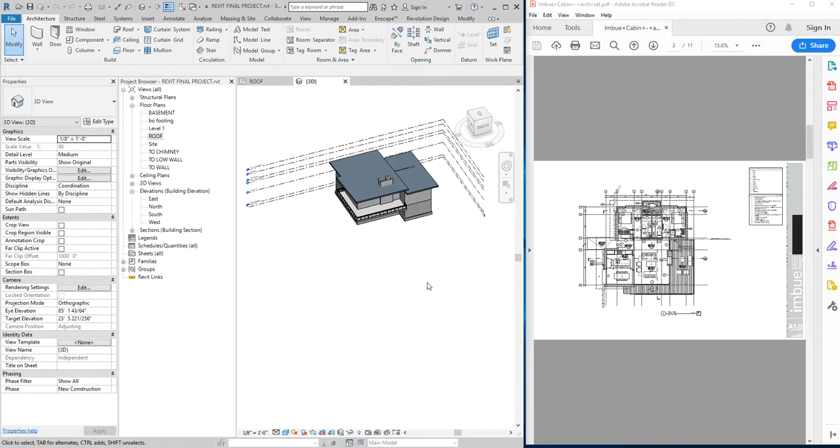All right, so I'm going to add the garage, which is part of our late term project here. Let's go to assignments, then to the late term project, and take a look at things.

So the garage isn't tricky really, but there are probably some things you haven't seen happening before. Let me put it in place of this little guy here. Okay, I can't quite get it. I might have to pull it onto my other screen. Let's just talk about it instead.

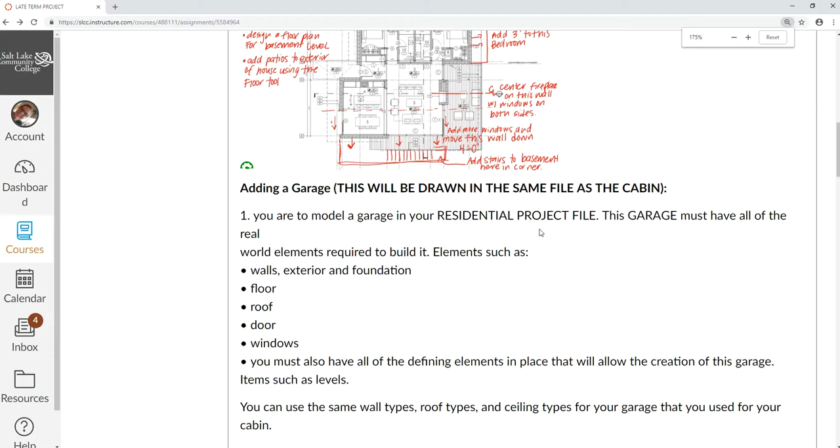So basically, this is what the garage is going to look like. I'll zoom in here and point out some things. It's going to be 20 feet away from the house, and the roof is going to slope just like this roof right here, so this is the tall point and it will go down to the low point.

This is what the wall is going to look like. There's going to be a little footing, 30 inches below our grade, which can be considered finish floor, level 1, or ground level. We're going to have a foundation wall that comes up to finish grade but then extends up 18 inches above that. So the garage will have a concrete stem wall all the way around it, and the wood wall will begin at that point and go up towards the roof.

So things you maybe haven't thought about doing, we're going to talk about in this detail as we create this garage. This will require us to create some new levels for the garage, to get our walls working correctly, and to use base offsets and top offsets to make things work. We'll have to create a new roof, and I'll have to check inside Revit again - if it doesn't have a garage door built in, we'll have to go to somewhere like Revit City and find a garage door to install.

All right, so I'm going to just look at this on my other screen here. Sorry guys, I wish I could put on the other one, but I guess I can just maximize this since we're not looking at both on the same screen anymore.

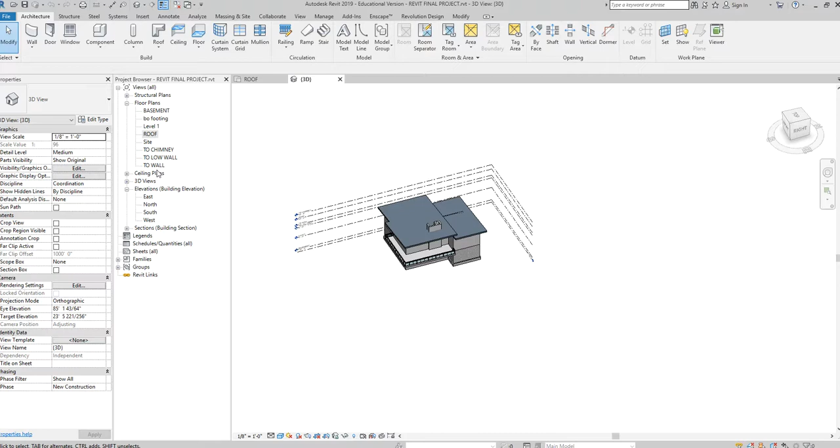So first thing I'm going to do is go to top of wall here, in shade view. I'm going to go to top of wall because I want to see where this roof is. I think that maybe my roof or my deck is longer than it should be.

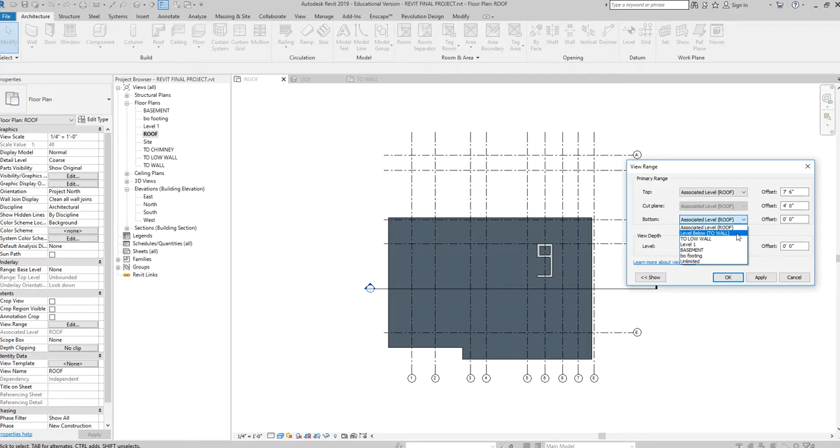Or maybe it's just being cut off from my view. Let me look at my roof level here - yeah, okay, my roof looks pretty good, so I think it was just cut off in the view we were looking at. I'm going to come down to view range and edit the way I'm viewing my tall roof floor plan so I can see the lower roof below it. Top of wall - there we go, looks pretty good.

Okay, so my garage is going to be 20 feet away from the section of this building that has that larger roof that kicks back, jogs back right there. So it's just going to be below here, essentially.

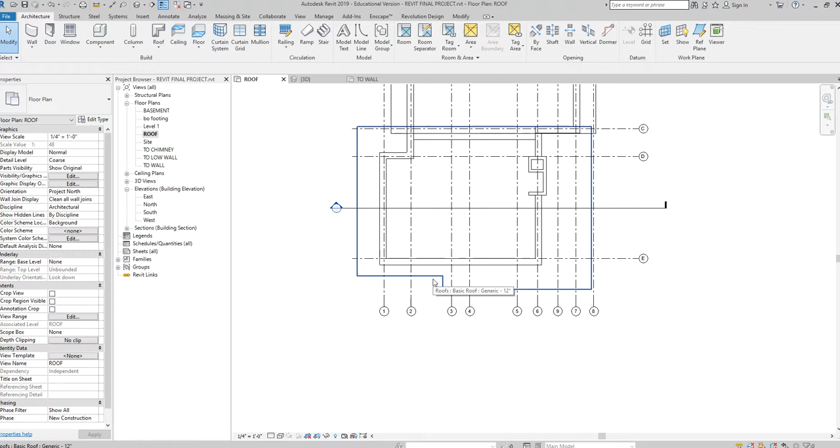So I'm going to change to wireframe view, WF, and I could also come down here and change my views to hidden line or wireframe. The reason I'm doing that is because I know my garage has to be 20 feet off of this exterior wall, so I'm going to make my roof wireframe so I can see through it and see this wall below it.

Before I actually start drawing that garage, I know it's 30 feet by 24 feet. I need to look at my levels and determine where those levels are going to fall for my garage. So I'm going to go into my north view here and look at a few things, and I think I'm going to still establish... let's see.

I'm going to establish my level 1 as the level for my garage, so there's no steps around my house, and the garage is going to be on the same level as the house. Maybe a little shorter, about 10 foot tall. I'll establish this level 1 as my finished floor for my garage, at ground level, finished floor level.

But I have to have a foundation wall that goes 30 inches below that, and right now I don't have anything 30 inches below level 1 to indicate where my garage foundation goes. Don't be confused by the term foundation wall—think of it like a basement wall, just a short one that goes 30 inches below ground instead of 8 feet. We'll treat this foundation wall the same as a basement wall, and this little footing the same as the footing on our house's basement. It may be a lot shallower, but it's still the same idea.

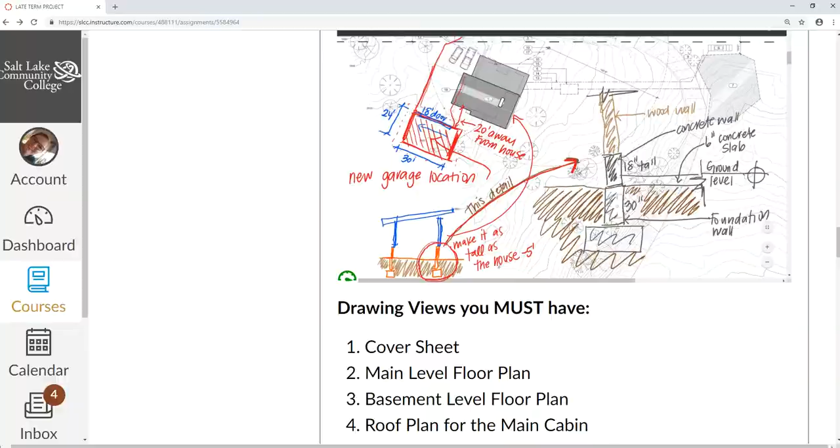So we'll have to do another bottom of footing level, but it's going to be for my garage. I'll call this bottom of footing garage.

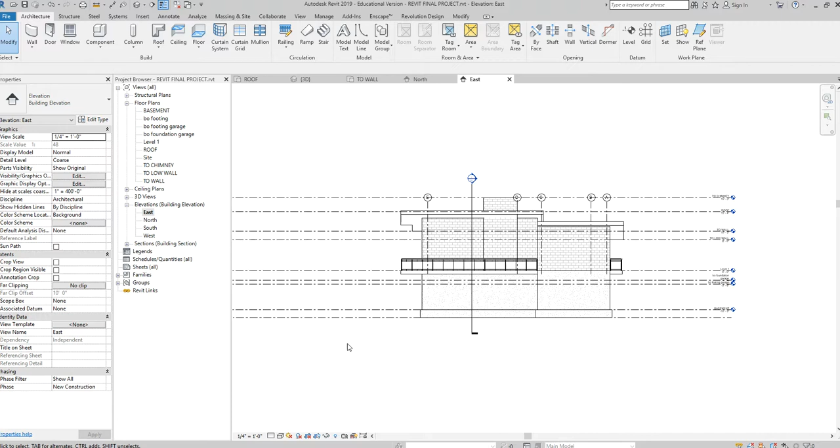Now these levels are going to start showing up everywhere. If I go to my east elevation on my building, I see those new levels. If I go to the south, I'll see them again. They don't really relate to my house, they relate to my garage, so I could likely choose to turn them off. If it gets kind of cluttered, I'll probably do that. If my drawing is not very cluttered, then I might just leave them on.

You guys will of course have lovely windows and everything on your projects. If my text begins to overlap like this, I'm going to click on it, click on that little elbow, and make everything look the way it should.

So I'm going to go back to my level 1. We've established that the garage is going to be on this side of the house, and now I'm going to start drawing the outline of my garage.

Here's one thing you have to think about—it's not necessarily on the plan, but the garage is 20 feet away from the house, yet my garage has to give enough space so the cars can drive in there, which means I have an 18-foot door here. My garage is 30 feet. Let's say my driveway is going to be 20 feet wide—we'll just make up a number, or you could do 22 or 24. I'll look at your drawings and see if they allowed enough space for the cars to come back here and get in. In placing it, in terms of how far away the garage is from the house in this direction, I just need to think about cars driving back in there.

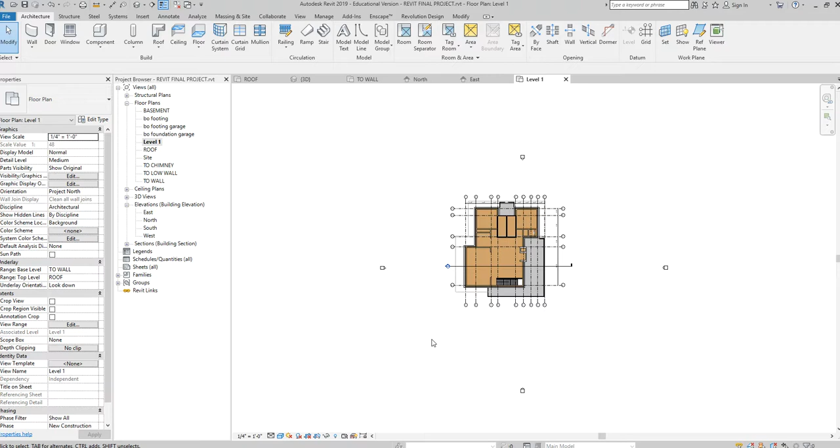Again, I might draw it and not get it quite in the right spot, but this one I think I can do a pretty good job. So what I'm going to do now is start placing my garage, using reference planes to help me get it in the right spot. Reference planes are kind of like construction lines—I can place them in my drawing and make them a specific distance away from items, but they don't print. So they can help me line things up, but then they don't print, which is nice.

So I'm going to type RP, reference plane, and I'm going to draw one here, and one here. I didn't really measure because I likely couldn't have gotten them the exact dimension away from the house I wanted them to be. But I know that this first one I want to be 20 feet away from the house because that's how far the garage needs to be from the house.

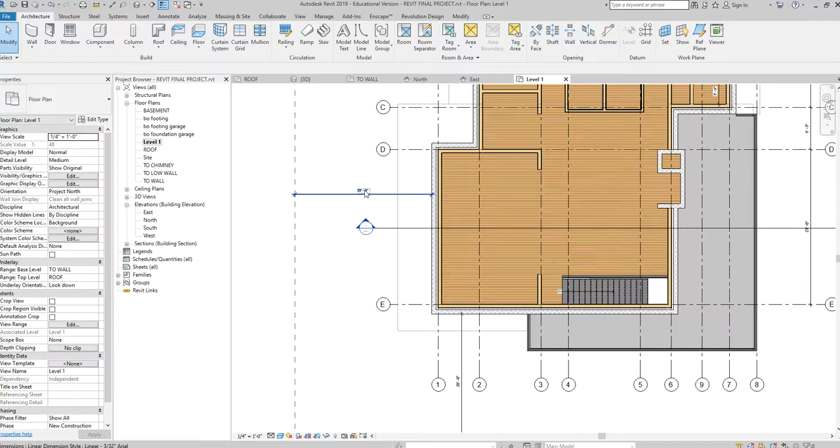So, DI dimension, and that says 9'7". Well, we want it to be 20 feet away from the house. So I click on the reference plane, click on the dimension, 20 feet. Perfect. Now I want this to be at least 20 feet away from the house so my little cars can get into my garage. DI dimension, click, and I'm going to tab, click. There we go, pretty close. We'll do 20 feet. So what I've just done there is established that my garage has to kind of start, one of the corners has to kind of start right here so that my little cars can come down and drive in very nicely.

All right. So I've done this, but now I'm thinking to myself, well, I'm going to draw my walls. The base constraint is going to be the main level of the house, but the top constraint - you'll notice I made a little change. I drew this and then I thought, you know what, I think I'm just going to say make the inside height of the garage 10 feet for the lowest point instead of the noted height. So this is kind of a little mistake right there.

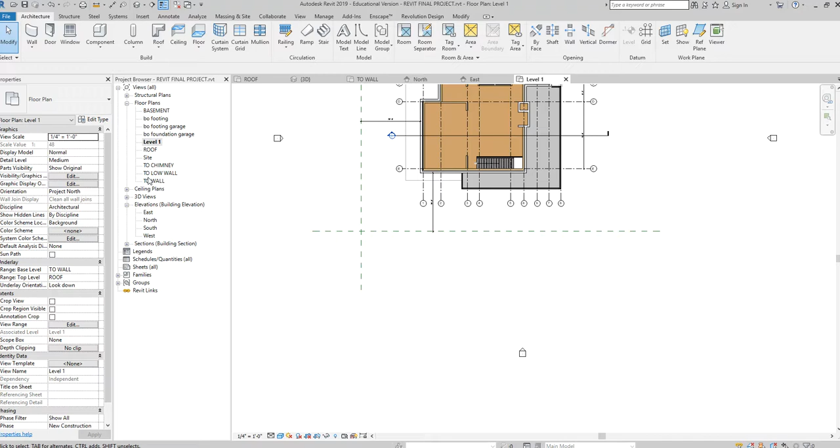Okay, so I'm thinking, how am I going to make that garage 10 feet tall? Well, I need to create another level, right? So I'm going to go to my north elevation again, which is where I like to create levels. And I'm going to go to level. I'm going to create one more level, and it's going to be 10 feet, and it starts to make things messy, which I don't like, but I have to kind of deal with. Okay, I'm going to call this top of wall garage.

And it's okay, you don't want to make too many levels, but don't be afraid to have them. I mean, they are there for a reason, right? They're organizing your drawing, they're establishing datums. So don't be afraid to have them. Okay, so I've now defined top of wall garage. I have my foundation wall for the garage and the footing for my garage. And top of wall will sort of, for my garage, establish where the roof sits. So I think I have everything now to create my garage.

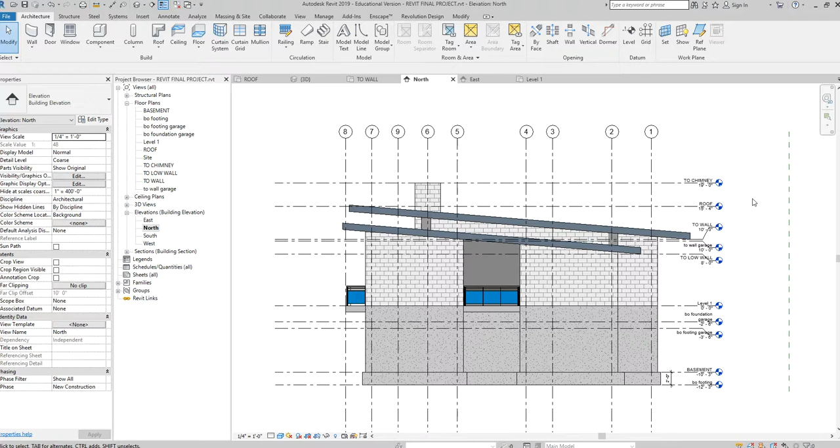Back to level 1, and I'm going to use this exterior wall to create my garage. So I'm going to do that right now. I'm going to grab this wall, and I'm going to choose create similar. We talked about create similar, and I'm going to draw a garage that is - oh, I want to draw from the finished face exterior - 30 foot by, we'll say, 24 foot. It's almost as big as the little house.

There we go. So now if I pop into 3D, got a lovely little garage happening over there. Okay, so, oh, I forgot to define my walls after I went and made those levels. I'm going to grab my exterior walls, hover, tab, click. Okay, so finished face exterior goes from level 1 up to top of wall garage. Oh, it just defined itself nicely for me.

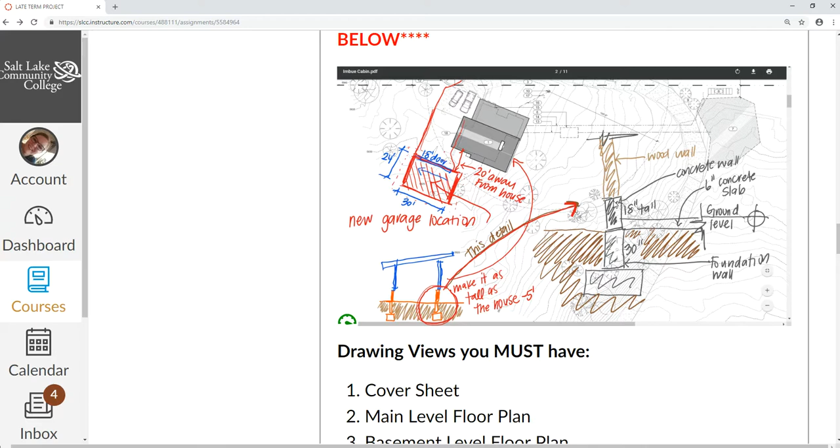Great, that is wonderful. But I need to look at a few things here before I continue on, because the next thing I need to create is the little foundation wall that goes underneath that garage wall, right? And that little foundation wall starts 18 inches above my finished floor, and it goes 30 inches below my finished floor. So my actual exterior wall that I just had drawn, that won't actually go down to the finished floor. It needs to be up 18 inches to accommodate that little foundation wall below it.

Okay, so what that means is that this wall, it needs to have a base offset. Okay, so let me - we'll look at these as we draw. Hover, tab, click. So instead of it starting at level 1, I'm going to give it a base offset of 18 inches. Hit enter. And, oh, maybe - did it already hike it up? Yeah, did you see that? Okay.

There we go, hiked it up. So now if I look at these in elevation view... oop, my elevation is not showing. Ooh, we gotta do something else too. If I look at this in elevation view, there's my garage. There is level 1 right there, and that garage wall is sitting just above it.

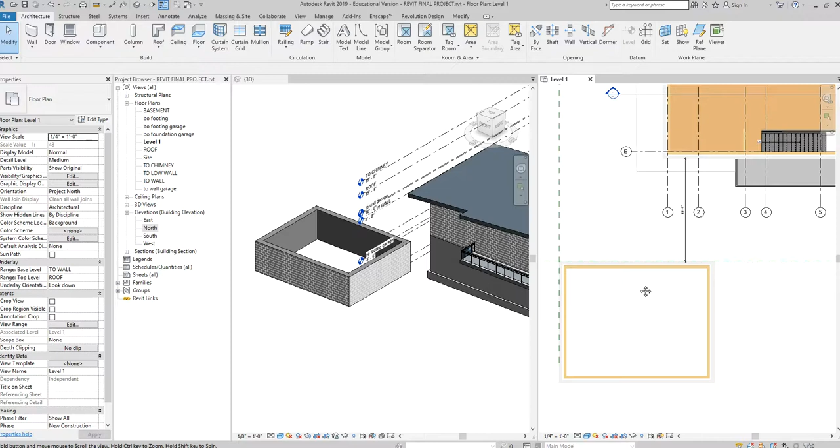Okay, so now what that means is that I can generate my little foundation wall below that, right? And it will work. So I'm in level 1 again. I'm going to go to wall, and we're going to do our little concrete foundation wall here. This is going to go from the base constraint of bottom of foundation garage, and the top constraint will be level 1, right?

But then you're thinking, well, if it goes to level 1, there's going to be an 18-inch gap between level 1 and that wall we just generated, because we bumped it up 12 or 18 inches. So I'm going to do it as is so you can see what's happening, and then I'll give it a top offset to fill the gap. Okay, so that looks pretty good to me.

Use my pick tool, and I'm going to change my location line to finish face exterior. Click, click, click. There's something very satisfying to watching all of that happen over there, right? And I've just generated the foundation wall, but there's a gap there, right? Hello. But that makes sense, because I gave this a base offset of 1'6".

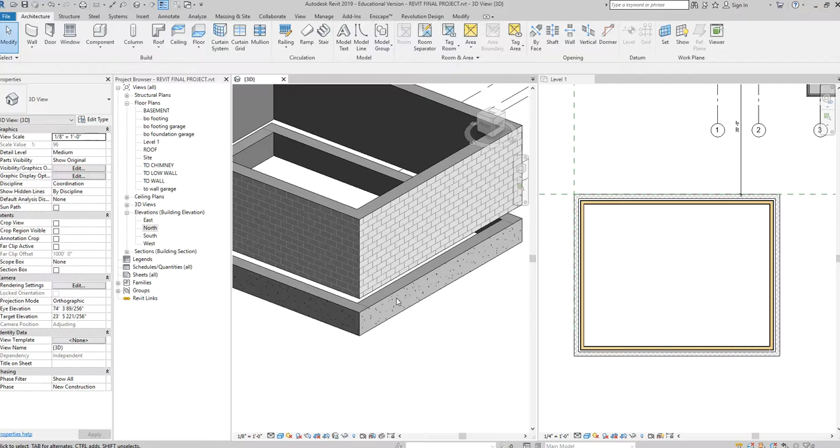So now I need to take this foundation wall, tab, click, and I need to make it so it comes up and meets that wall. So I'm going to give it a top offset of 1'6".

And there you go. So I look at the south elevation, just nice and wonderful here. Okay. There we go. So here's my main level right there, and my foundation wall comes up above 18 inches above. My wall comes down and meets the top. Okay.

All right, so that looks all good. It's time for me to add my footing. So now I'm going to go to bottom of footing garage, and I'm going to add my little footing wall, which is just a thickened foundation wall, right? We draw it exactly the same way we do the foundation wall, but it's just wider. We talked about that last time.

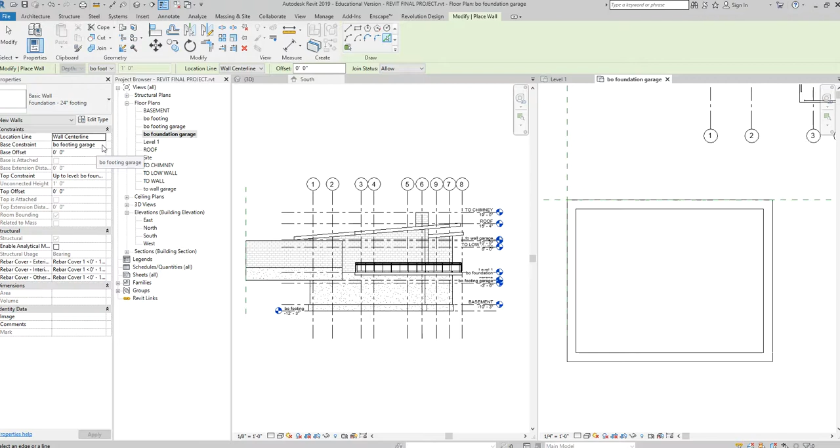So wall, and this one is going to be my footing. We're going to draw it to the center line. My pick tool. Let's see, bottom of footing garage. No, we want it to be, yeah, bottom of footing garage up to bottom of, that's the top constraint. There we go. Okay.

Click, click, click. And I pop back into my 3D mode, and there are all my nice little foundation walls. Okay.

Now I'm going to create my floor. Well, I'm going to create, yes, I'm going to create my floor in a second. I think I'm going to create my floor after I add my garage door, and I'll show you why in a second. But first I'm going to create my roof, okay?

So I want my roof to slope the same way as the house roof. So this is going to be the tall side, that's going to be the low side, and I believe this was a 1/12. So we're going to do the same thing here. I don't think I specified an overhang, did I? Let's do a 2-foot overhang, just to make it weird.

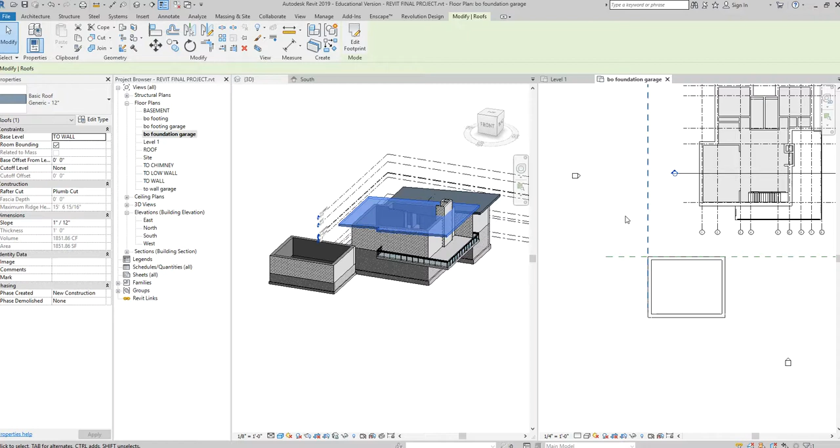All right, so now I want to open up my top of wall garage. Am I missing it? Top of wall garage. There it is. Oh, but I don't see the top of my wall garage, because this level is actually viewing top of wall 4 feet above that level, right? The cut plane is 4 feet above that, right?

There's so many settings in Revit. And just when you think you've set it right in one view, you change to another view and it's not set there, right? So, you know, it's just one of those things where, I mean, I hate to say it, but you just have to get used to it. And the only way that you sort of figure out if you're doing something right or wrong is you've done it 18 times, 20 times, and then finally you're like, oh yeah, if I do this first, then it will work, or, you know, vice versa, whatever.

So I know now my view range, I want the bottom of my view range to go to level below. Okay, and I can see my garage now.

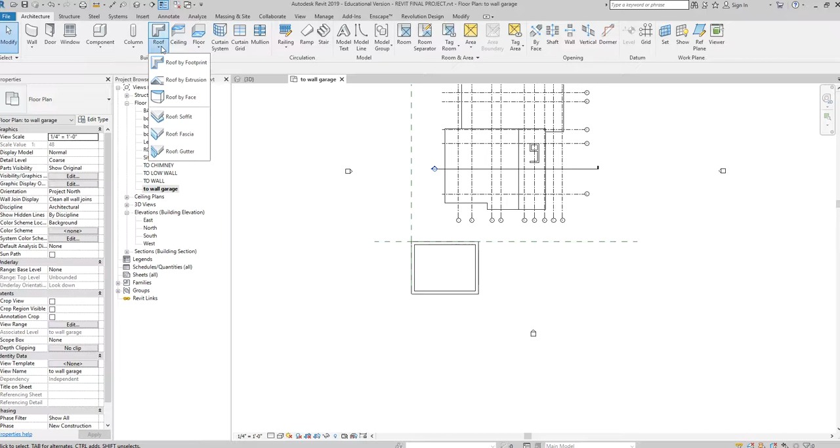All right, time to create my roof. So this roof is the generic 12-inch. We're gonna leave that as is. And I'm gonna go to roof by footprint, and I'm gonna choose an outline. I'll do a 2-foot offset.

Click, click. And now this is a single slope roof, and I want this to be the high side. This is the low side. So the low side is going to slope up to the high side. But with a single slope roof, only one edge of the roof is going to slope. So I'm going to uncheck defines roof slope. I'm going to click on this and give it a 1/12 slope.

And I'm going to hit finish and hope it works, right? And we have our little garage roof.

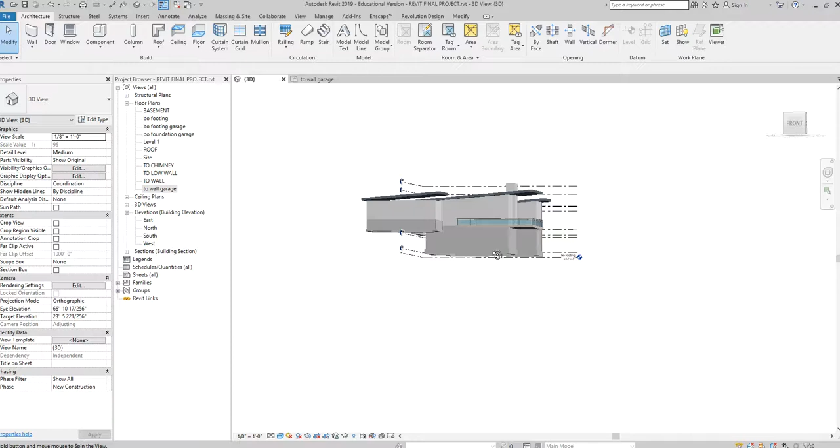Now, what is that? We got a floating foundation wall, or a footing. Delete that.

Now I want my walls to come up and meet my roof, so I'm going to hover, tab, click, attach top to base, click, and they go up and they meet the roof there. Wonderful.

All right, so I'm gonna go back to level 1 now. So I have a garage, I have my house over here, right? What I wanna do next is add a garage door. So I don't think there's a garage door in Revit for me to use, so I have to load it in.

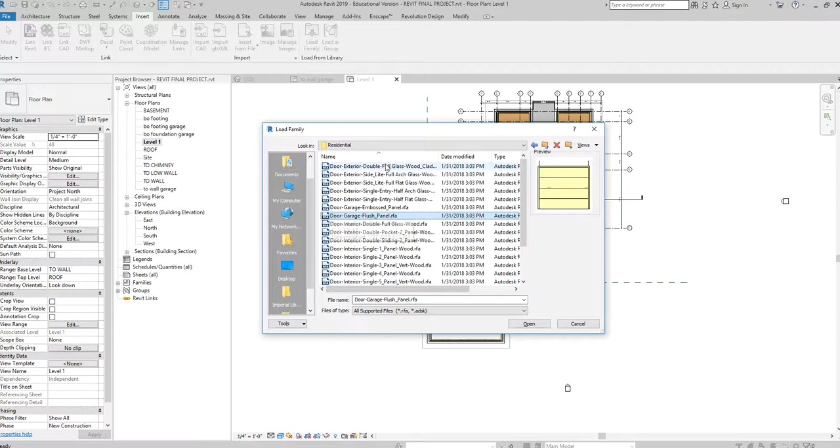So I'm gonna go to Insert, Load Family, and let's see if we have a residential garage door. I don't know if we do. Oh, we do, we'll do that one. Open, and I just loaded in a garage door.

So now to use it: architecture, door, garage door. This is 96 by 84. I want it to be 18 feet wide. Let's see how wide 18 feet is, I wonder how many inches. 18 times 12 is 216, okay, just for my own reference.

So I'm going to edit type, and I need to create a new garage door, right? So this one is 8 foot wide by 7 foot tall. So we'll make it 8 foot tall and 18 feet wide.

So I duplicate it, and I'm going to give it a new name: 18 foot wide by 8 foot tall. I just essentially duplicated that garage door, creating a new one, leaving the original in its original dimension, right? This one's width is going to be 18 feet now, and 8 foot high, and I hit OK.

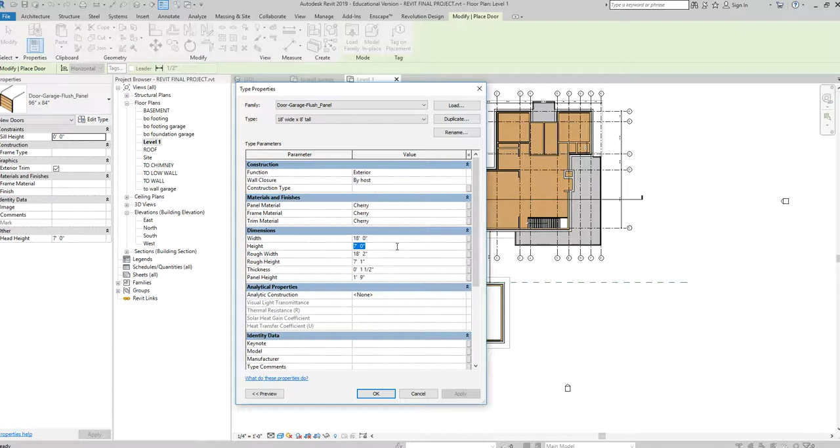And now Revit's just waiting for me to place it somewhere, and I'm going to hover over my garage, and it's going the wrong way because you can see those blue dashed lines. So I'm going to move it, there we go, there we go. So we'll move it somewhere in there, right? There we go, that looks pretty good.

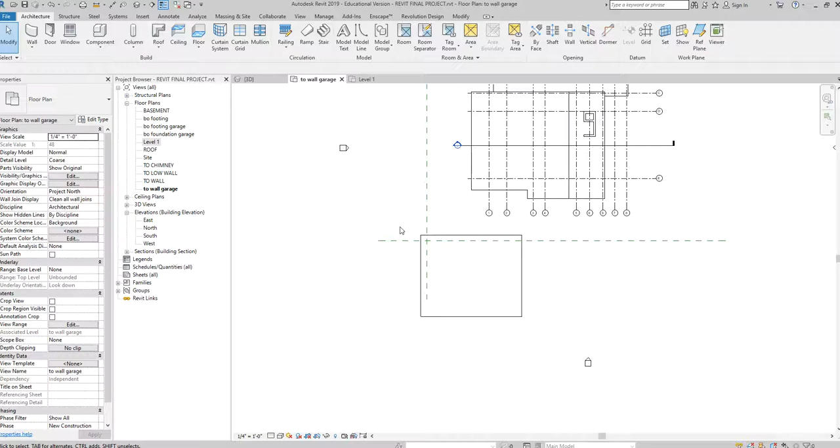So now I pop into 3D, and there's my garage door. Maybe I should have moved my garage over a little. I'm not going to change it now, but there we go. If you want, you can put a little man door in there.

Let's do a little man door right there. There we go. Okay.

So we have our garage, we have our roof. Looks pretty good, right? I like that. Everything is looking the way it should, except I don't have a floor in there, right? I need to add a floor.

So I'm going to go back to my level 1 here, and I'm going to draw my floor. So I'm going to go to floor, architectural. This is going to be, well, we'll leave it at a 4-inch slab, that's okay. And then I'm going to draw the outline of my floor.

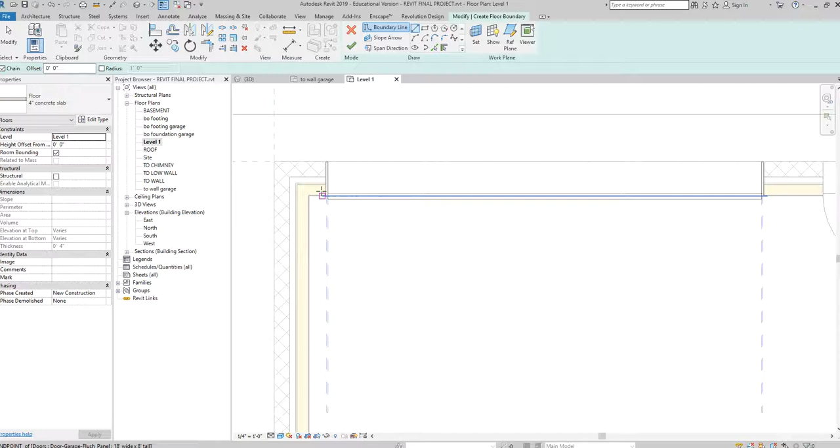Okay, and I'm going to draw it. I can't see the outline. Hold on one second. Wireframe won't let me. All right, I'm going to make it very simple here.

It needs to go further into the wall, these walls are supposed to... I'm not sure where my foundation wall is sitting within here, so I'm just going to draw it so that it outlines the garage here, even though that might be a teensy bit incorrect, but there we go. And we'll even kind of take it out here. There we go.

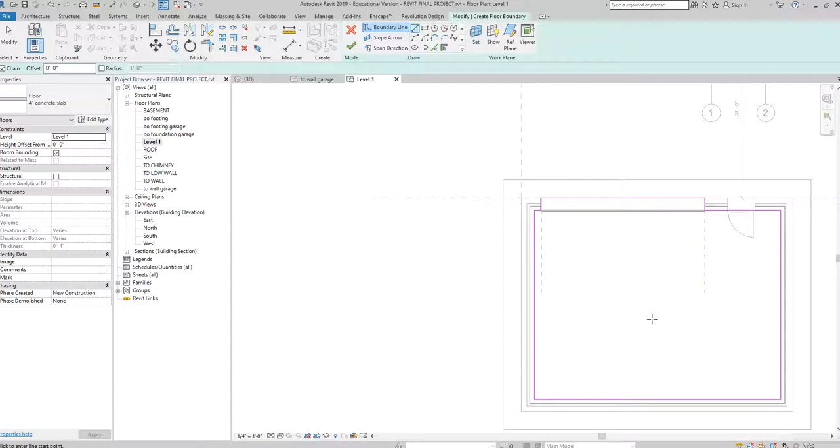Finish, no, okay. So I've got my little garage floor in it now, I can see that, right? And I have my foundation wall that goes up above the floor, right?

18 inches, I have my wall on top of it that comes and meets it, right? We're accomplishing that by giving a base offset to the main wall and a top offset to the foundation wall below. Got my little footing, my garage door, my man door, my roof. Everything is looking great with the garage.

So that is what is meant by this detail, right? I wanted you to understand how you can take these walls and manipulate them, offsetting them above and below the plane where they need to lay, right? So any questions on any of that so far?

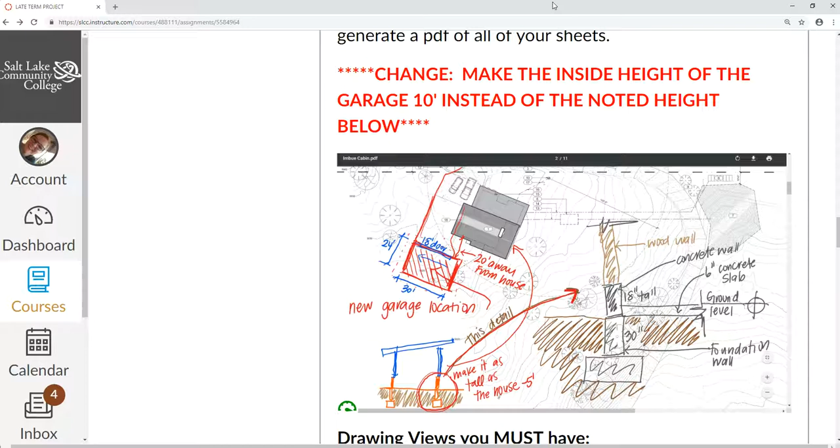Not terrible. Done it a million times, right? You can slow it down on YouTube and just follow along.

Okay. So Erica had a question about ceilings. What was your question about ceilings? I don't know if I'm placing them right, because I know it's like the flooring.

For ceiling plans, the first thing to remember is that when you draw them, you want to go into a ceiling plan, right? You don't want to draw them on a floor plan. For example, this is tricky because it's sloped, so for right now I'm just going to draw a flat one. But for my ceiling plan, I need to go to the ceiling plan that corresponds to the floor plan I'm drawing in.

So in this case, I go to level 1, right? And if this were indeed just a flat sloped roof, I'm going to draw it the way it should be and talk about it. This one is actually a bit complicated, we've got two slopes. I think we're going to call it okay if we just do a flat roof in here for now.

So I'd click on ceiling, right, and I'm going to sketch my ceiling. If I wanted to draw a ceiling, for example, in the kitchen here, I would come into the kitchen—you're likely going to draw these in pieces, per room. I would pick the kind of ceiling I want, like gypsum board on metal stud, hit finish, and there's my first ceiling.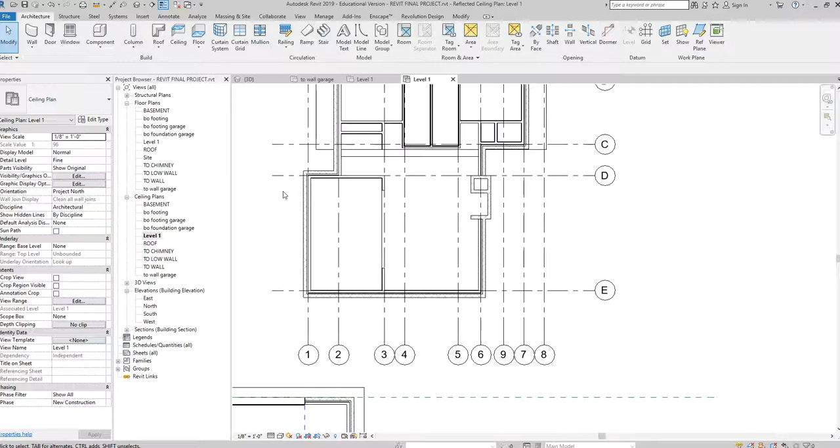But the other thing that is somewhat helpful is that you can go to the section and draw a section through it and look at it, right? You can say, oh, it's actually lower than I wanted, and move it where you want it to go. Or you could grab it and say, well, I want it to be 9 feet above level 1, and change it over here if you wanted.

So those are a couple of ways that you can get it into place. Is that what you were asking? Okay, and then I'll hurry and go over how it slopes, right? So if you want it to slope, it's a little bit more tricky. I kind of talked about this before, but I don't know exactly—I know this is a 1:12 sloped roof, right, and I know that it's going to be...

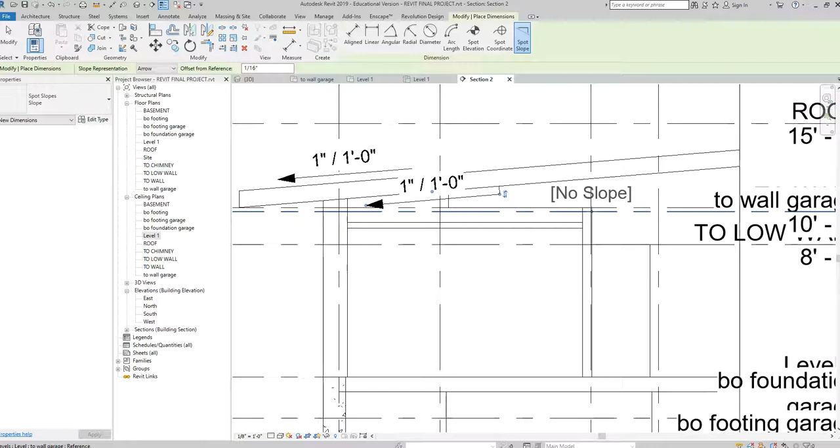It's going to be the same on the top and bottom side, because it's not a truss that has a different slope on the bottom. Let's see. Look at that, isn't that nice? I'm always questioning myself. But it's a 1:12 on the top and bottom slope of the roof in this case. I wish you could just input a slope like that into your ceiling—you know the top of the roof is a 5:12 and the underneath on the truss is a 3:12. I wish you could input that, but you can't.

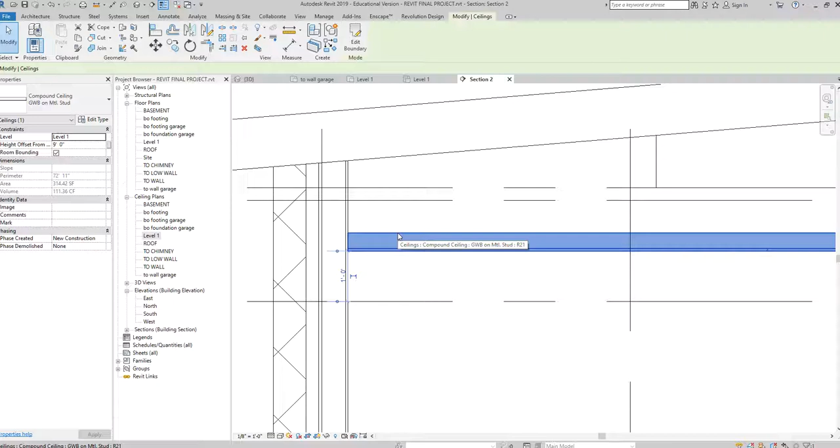So the best way Revit has given us to slope this and make it actually function is using a slope arrow. Now this is not in the right spot, so I'm going to move it, MV, to kind of where it would start. They would kind of start at that point on the roof. And actually, we wouldn't have a stud there.

So I'm going to alter the type of ceiling I'm creating—edit type, duplicate. Edit the structure, so I'm going to move my gypsum board up. Delete that structure, change this to structure. And we'll give this a pattern here, so I want to see that actual gypsum. There we go.

So now instead of just having that ceiling with that stud, I have just the plane of gypsum board. I'm going to go back to my ceiling plan level 1.

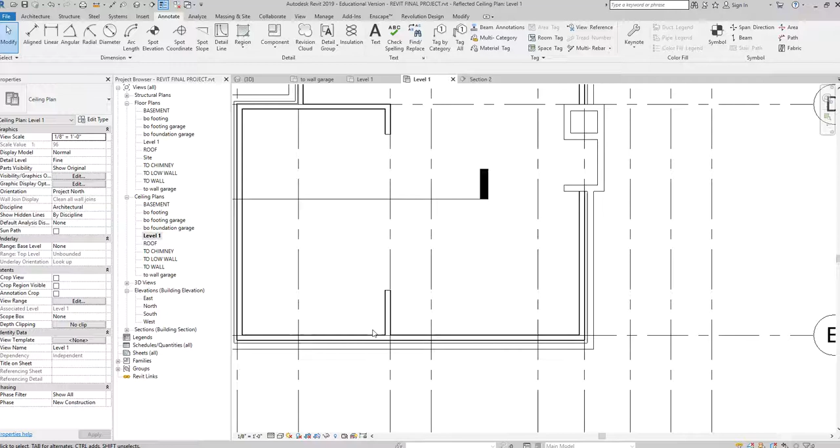I'm going to grab my ceiling. I'm going to click on it here in my section and hit edit boundary. There's a little trick for you for selecting things. And reflected ceiling plan level 1.

I hate the sloped roof workflow in Revit, but it's all we have, right? The way we're going to slope these is to use a slope arrow. I click on slope arrow, and I have a tail click, and I have where it slopes up to. So I have the height at tail, and I have the height off. Let's see, we have the height at tail and the level at the head, right? So right now, my tail, which is this point, I'm going to do 0.

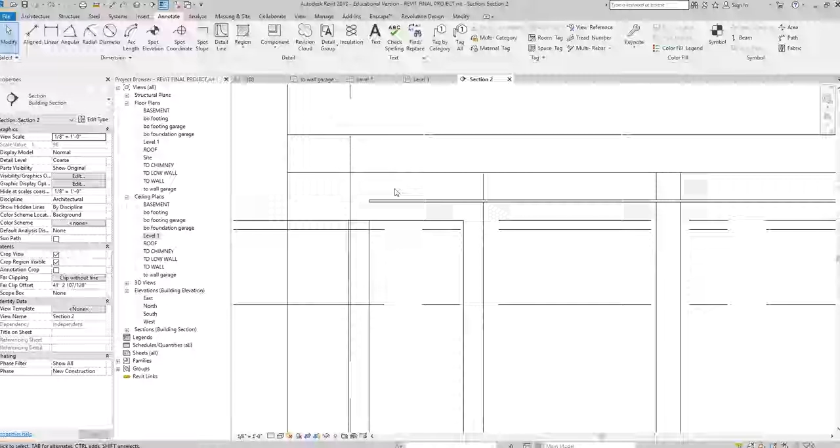Okay, I'm going to hit finish. By doing what I've just done, let me delete that section. There's no way of easily showing this. I've just established... oh, sorry guys, I shouldn't have deleted that other section. Where did it go? Let's do that one.

We're sloping from here to here, right? There we go. I've just established the tail there. In fact, I think I might have deleted my arrow. There we go. Okay, so the tail is at 0.

The level at tail, we'll just leave it default height at tail, and then we don't need to worry about that. Level at head, I'm going to give it, we'll say top of wall. Let's see how close we can get. Top of wall, I'm going to apply that. So we have the level at the head of the arrow and the tail of the arrow. I have to specify the height here, and I have to specify the height here. Hit finish.

And you see how it's kind of sloping up. Do you see what's happening? I'm starting to get a slope going up, but it's not enough. So I have to continue. Essentially, what you have to do is continue to play with this until you get the slope at the head and the tail correct, so that it's the same slope as that roof, the underside of that roof.

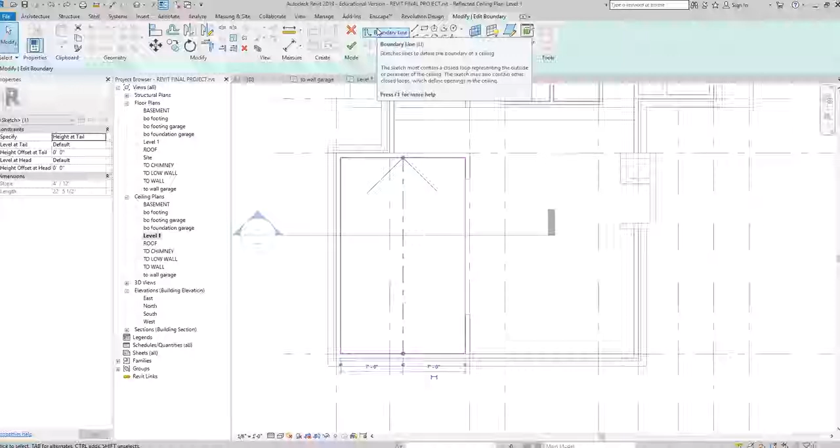And there's really not an easier way to do it. I wish there were. I wish I could add a 1/12 slope, or rotate the ceiling and align it, but you can't do any of those things. So for our purposes, I'd say just get it as close as you can to sloping up to that point, and we'll call it a day. But that's how you're going to draw the ceiling, how you can edit the ceiling type to be just gypsum board. Then to get it to the height you want, you can change it over here in the properties, or move it up and down using the move command. And then to slope it, you'd have to add a slope arrow to it. There's just no easy way of going about that.

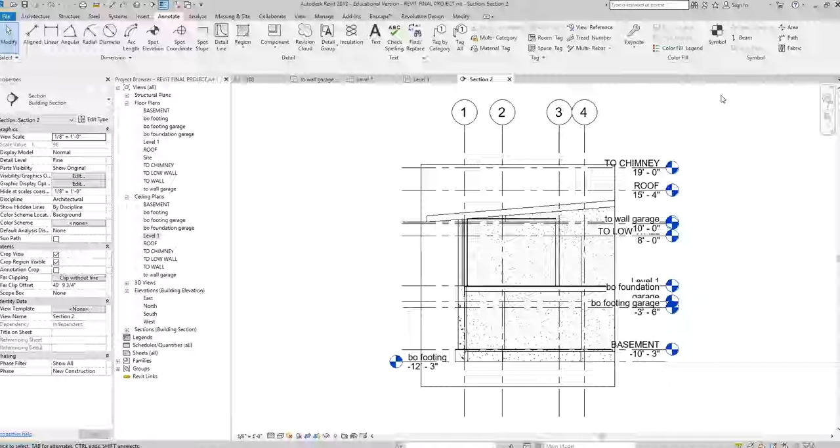Okay, that one's kind of a tricky one, right? One thing I want to do before I show you how to add a piece of topography in here, so that we have a ground plane, is talk about one other thing. I want to talk about adding your drawings to sheets.

And I just want to show you some nice things that I think will help with your drawings. For example, for this project, we all know how to create a title block here, right? We can add that, and we know we have to drag level 1 onto sheet A101, and that will place the view on the sheet for us to create a PDF out of. But I want to talk about drawing aesthetics, and how you're going to make your drawings look nice.

So let's see here. Hold on one second, let me look real quick.

Okay, so the first thing I want to point out is how you're going to separate your drawings. Right now, this floor plan, level 1, includes the floor plate of the house, but it also includes the floor plate of the garage. If you want to separate those two things out and put them on separate sheets, without doing a lot of extra work, let me change this to a hidden line view and delete a couple of these things.

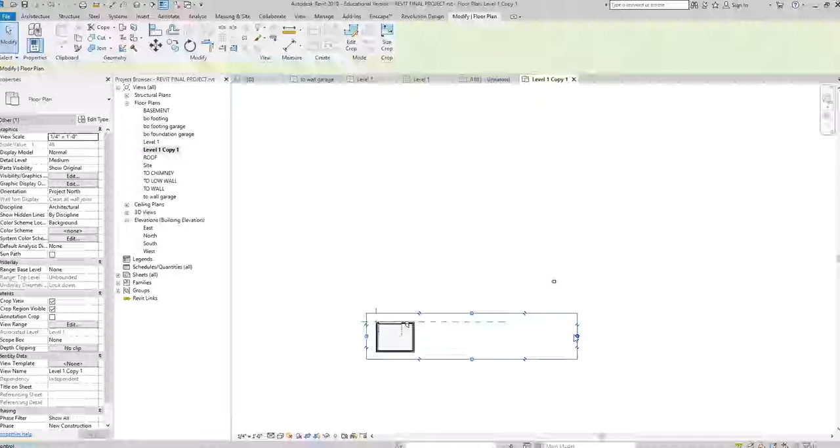Now if I go to level 1 copy, if I just want to show the garage, I would crop the view, turn on my crop area, my crop boundary, click, and I would just show my garage. So that's how you can manipulate the views to just show what you want to show.

So now what I've just done, this is level 1 copy 1. I can right click, choose rename, and I can call this garage level 1. I can do the same thing with elevations.

North elevation, right now my north elevation is showing my house and my garage. So if I want to show just my house, right click, duplicate with duplicate view with detailing.

We can call this, right click. Actually, hold on, I'm going to show you another way to do that. Pause that conversation, let me show you something else that's easier, I just thought of. We'll come back to that. Let me get these other floor plans on a sheet first.

So I have A101 and I need to put the floor plan on here. That's going to be one of the drawings you need to do. So I'm going to grab my level 1, drag it over, and I'm going to click and place it. That looks pretty good, right?

Some things I notice here. Level 1, it's 1/4 of an inch equal to a foot. That seems like a pretty good scale for this drawing, right? If I wanted to alter the scale, I could click in the viewport. I could change it to 1/8 of an inch. It's just so tiny, right?

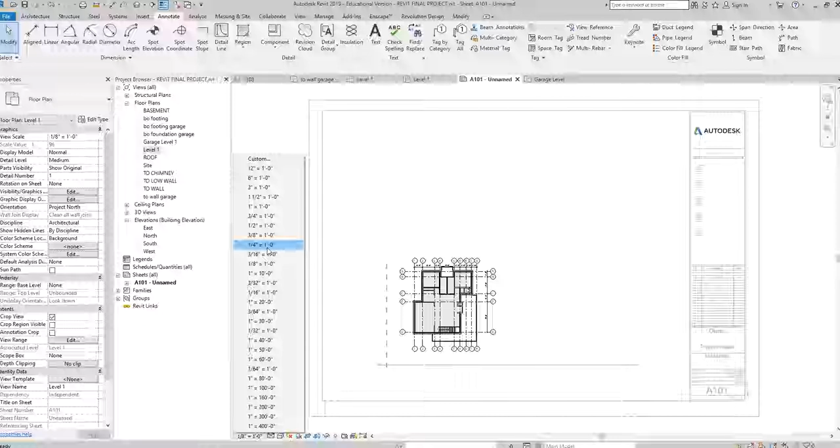So we don't want to see that. We want it to be readable, whatever that scale may be. So we're going to change that back to 1/4 of an inch. We're not going to leave it like that because it just doesn't make sense. I'm going to right click and hit deactivate view.

These are things that I like to see on your drawings. I like to see your drawings are at the right appropriate scale. Several of you have struggled with this, and I get it because this is all new to you guys. I like to see that the floor plan's kind of in the center of the page. It makes it readable.

So that's really easy to do in Revit. You throw the view on here. If you don't like where it's at, you click and hold and drag it to the middle. Easy enough, right? So that view looks pretty good.

I could right click and create another new sheet. And maybe this new sheet is where my garage goes. I'll drag my garage, and I know my garage is going to be smaller than my house. So I click and I place it, and it's kind of lonely on this sheet, right?

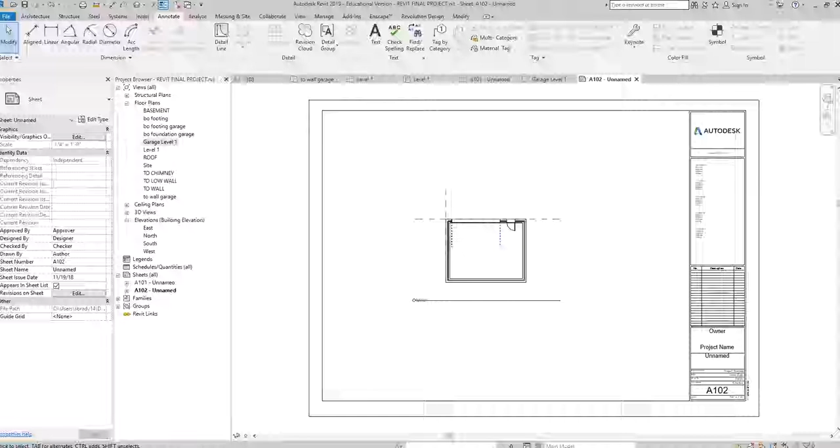Now, I've given you a list of sheets that you need to have. And I'm just going to give you the power to say, you know, my little garage was at 1/4 of an inch, and it looked kind of tiny and lonely on this sheet by itself. And if you were in an office, it costs maybe $4 a sheet to print. So you want to get as much on each sheet as you can to minimize printing costs, but also sometimes it just makes sense to add more information to each page.

So if it's a tiny little garage here, what if I put the garage up in the corner and then maybe I put the elevations for the garage on the same page? That kind of makes sense, right? Or maybe, you know what, maybe there's enough space for me to show my garage level 1 here. I can change where this floor plan lives. I can click and hold and drag it up to this A101, let go.

I could click there, or maybe I could have just left it uncropped on that same floor plan, right? Maybe not. Maybe it doesn't make sense.

So I move this over, right? It's okay, I think it's okay. You probably could have left this garage plan underneath here, and it would have all fit very nicely on the sheet, right? If this sheet's actually larger, it's a 30 by 42, but if this had been 24 by 36, this probably would not have fit on the page below the floor plan. So to split it up into different floor plans makes sense, right?

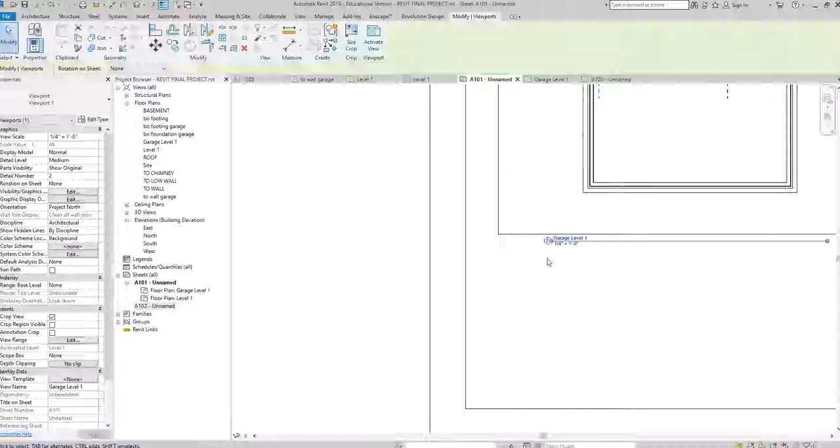I give this spiel in AutoCAD too, right? But your drawings say a lot about you as a designer, right? Are you meticulous? Are you detail oriented? Do things line up and make sense? These are all things that your client is paying you a lot of money to create these drawings.

I can forgive a beginning designer content, right? I just didn't know what the drawings needed. I didn't know how to detail it. I didn't know that the chimney needed this or that. I didn't know we needed furniture in there, right? I will forgive that more so than sloppy looking pages. So be like, oh, your drawings look neat, right? They look nice, you're missing some things, which we can talk about, but we want things to look nice and neat, right? So I can nudge them over, make them look really nice.

I'm going to do an elevation sheet here because I think elevations are a bit tough. North, well first of all I'm going to look at it. North, 1/4 inch is equal to 1 foot. Okay, well I'm seeing the garage beyond. Well, I think it's okay, except that kind of half the garage is being obscured by the main house. So we need to maybe fix some elevation stuff before we put it on a sheet, right?

And I sort of like to fix things in my view before I put it on a sheet. I say that because once you get it on the sheet, you're like, oh, I got it on the sheet, hallelujah, right? I'm done. But you're not done, because if it doesn't look nice, then it's not finished, right? And I think it's a lot easier to fix it here and then place it than to go back to the sheet and try to manipulate it, right? I get that. So I like to try and fix it in here as much as I can.

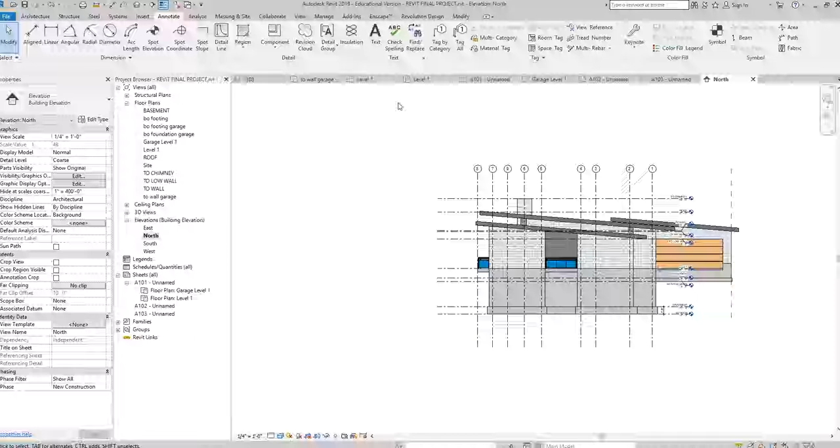Now with our elevation views like this, I'm going to go back to my level 1, click, click. Okay, all of my elevation markers seem to have disappeared here, right? Just some things I'm going to remind you of. I'm going to do not crop view. Well, there they are, right? They were just kind of outside my crop region. I'm going to drag those in as well and bring them very close to my little building.

There we go, because we want those to show. I forgot about them and I shouldn't have, right? That's okay, but I want to show you something about elevations. So my elevation marker's here. If I click on the little head of the elevation marker, I get a blue line. Okay, this blue line, my blue line is extending into nothingness. Let's see here.

Are you guys doing that? Okay. Hold on one second. Let's see here.

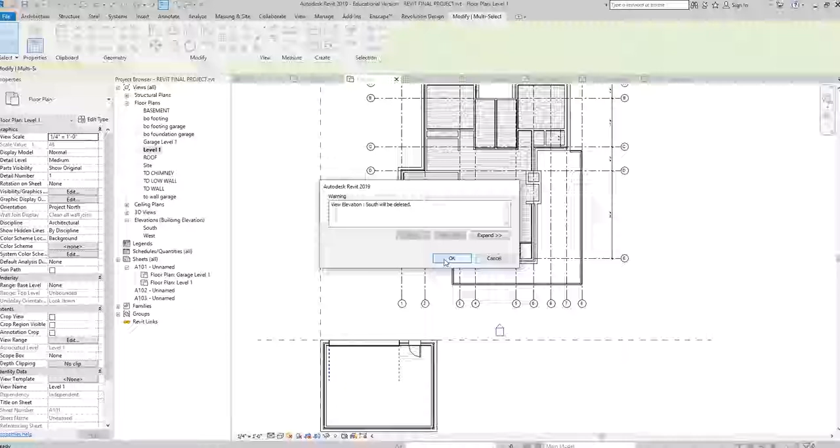I'm just going to go to View, Elevation, Elevation, 1, 2, 3. I think I'm fixing a Revit problem. Do you see how my elevations didn't have those little grips at the end? What I was looking for with my elevations, right, is we'll say this is the north elevation, right?

So what I did is I moved them in, and then I'm going to extend my elevation just past where my building goes, right? And I'm going to take this little drag marker and drag it to the edge of my building. So essentially what I've done here is I've defined my elevation just to be this portion. Now, if I had extended it past my garage, right, I would get my garage back there.

But if I click on the elevation here and I bring that little marker forward, now I don't see my garage, right? It's still there, I'm just not seeing it because I'm defining the depth of my elevation, okay? So what you're going to want to do with your elevations is click on this little head marker and make sure that your garage, at least for the building elevations, is not showing. They're not showing.

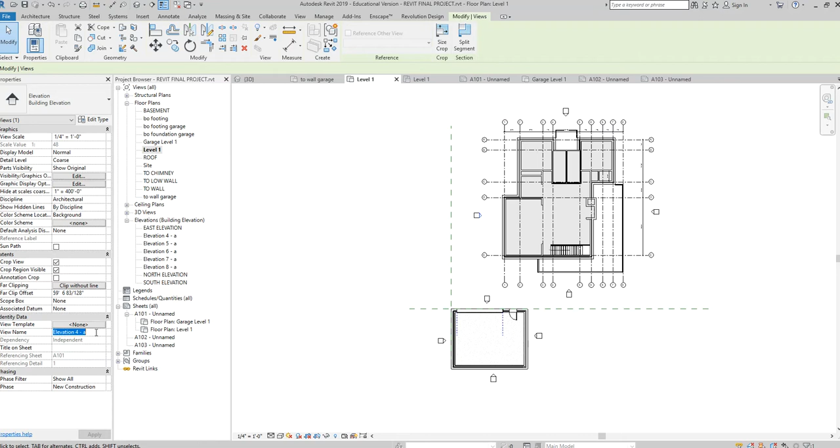West elevation, click, enter. And now I have all these garage elevations, so I can click on my little north and say garage elevation, right? You guys get the idea. And you can add as many of these as you need.

Is it when somebody's talking about you, your nose itches? Is that right? Hopefully good things.

South garage elevation, west, and then I have my west.

So I'm going to be adding my elevations now to sheets, but I want to go to each of these views first, click, click, and look at it to make sure the scale is right. 1/4 of an inch looks good. I want to make sure that all of my tags line up, and I'm going to turn that one off, right? If text is overlapping, or I don't want to see something like top of wall garage, I can click on it, right click, hide in view, element, and it turns off.

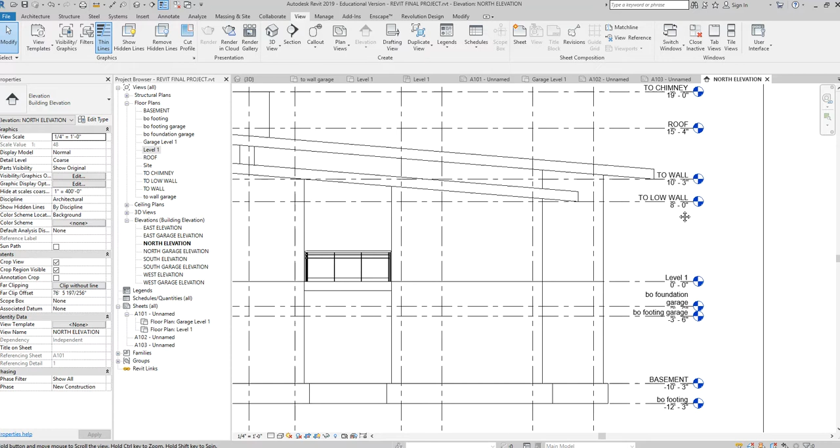So I can click on foundation for the garage. Doesn't apply to my house. So right click, hide in view, elements. Click, right click, hide in view, element.

My grid lines are on my elevation, which is fine with me. They're not all the way up here, I think my crop region is helping with that, but they're not all the way up there, right? We kind of want them snug down to the house, nice and neat. We don't want them to extend too far below the house, or too far outside the house. And it's just so easy in Revit to line those up.

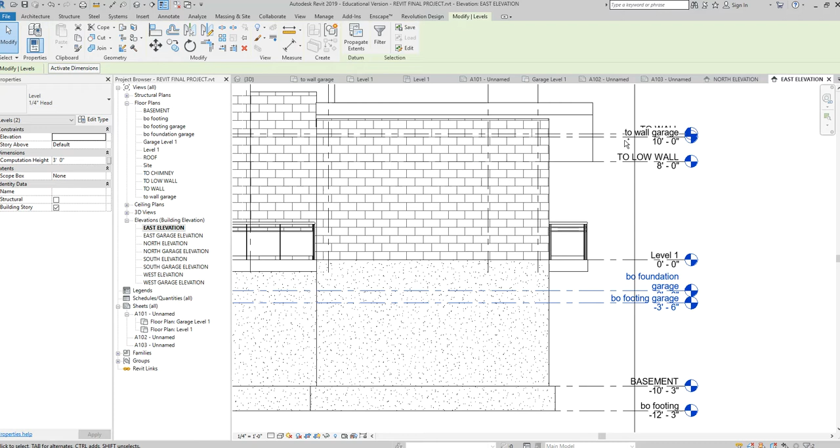In AutoCAD it's a pain in the neck, right? You have to stretch all of them and make sure that they all went the right direction. Hopefully you don't skew them somehow and mess everything up. But with these, really easy, okay? So that looks good. North elevation, we'll do the east elevation now. Click, click, 1/4 inch looks good. I just have a couple, you kind of end up doing the same thing in each view. So I'm going to click, hold control, click, click, right click, hide in view, elements.

That looks pretty good. I'll bring my crop region in just a little. Ooh, these grids are just overlapping the building, so I'm going to click on one. Look, it just drags them all up very nicely. Oh, they end halfway through the house. I'll drag it down very nicely.

Immediately my drawings become very readable. Again, it might sound silly, but drawings that are readable are going to have, hopefully, a lot less mistakes or a lot less questions on your drawings.

So we'll click on these, bring them down, looks very nice. Because without fail, that one little floater guy over there, your client will be like, well, why is that one over there? Like, well, I forgot to change it in Revit.

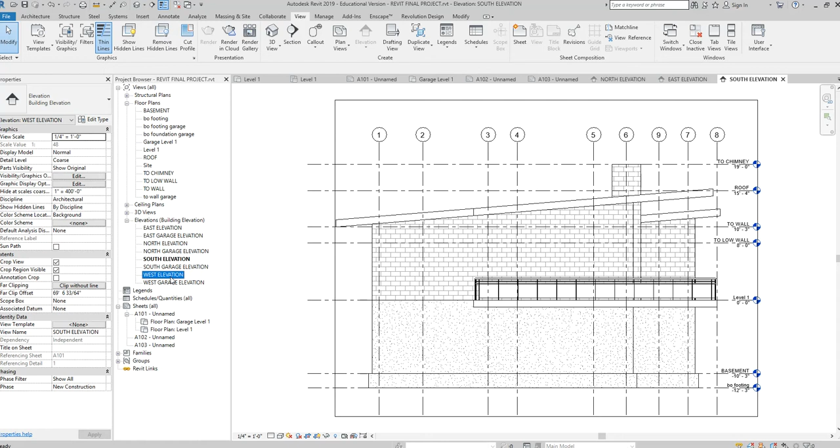West elevation, final one we'll do here, but I just change things. I turn off my garage stuff. Bless you.

And my crop region, me personally, I don't always like to see it. It doesn't print, but I don't really like to see it. So sometimes I'll turn it off, but maybe since you're so new in Revit, you leave it on just so that you can visually see kind of what's happening.

But by taking my elevations and changing the view range of my elevations, or the view depth of my elevations in plan view, my crop region, it's not doing a whole lot for me, and that's okay.

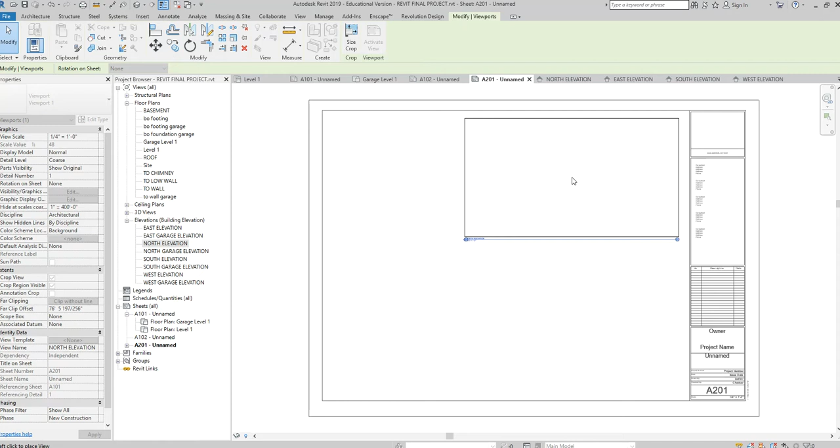All right, so now I go back to my sheet, we'll change this drawing to be named A201. There we go, and I'm going to grab my elevation number 1, north. Okay, and then I've got my east elevation. Oops, I clicked one too many times. East. And I'm really going to try to get them on the same page and see what happens.

Ugh, right? I'm going to nudge using my arrow keys. Click, nudge using my arrow keys. Bring them as close as I can. So close, so click, click. And I just drag my little ends in.

Click, click. All right, this is why I don't like the viewport, my crop regions to be on, because then it gives me a headache. So hide crop region, click, click, click, click, hide crop region, oop, yes, click, click.

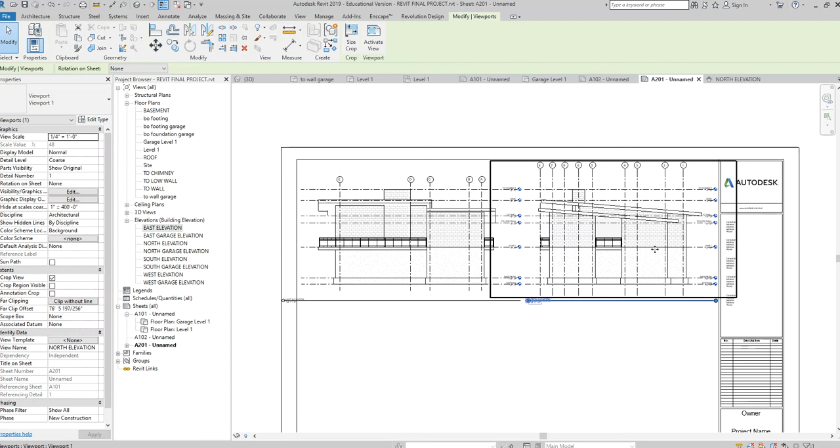Now I just have to deal with my view titles here. Click, use your arrow keys to nudge them. If your mouse makes it a little bit difficult to manipulate them, just use the arrow keys. Click, just move it over ever so slightly, the tiniest bit. Click, click. You can go back and forth with this all day, and it's really easy to manipulate them.

If I click on the viewport, my grips show up here.

Is that how you do the cover sheet? What do you mean, which part? So it shows that we have to do a cover sheet. And the cover sheet, is that just like the front elevation or? Yeah, so you could pick a 3D view or a front elevation. But if you want to use this one, it's already on this sheet. You just duplicate it and call it front cover elevation.

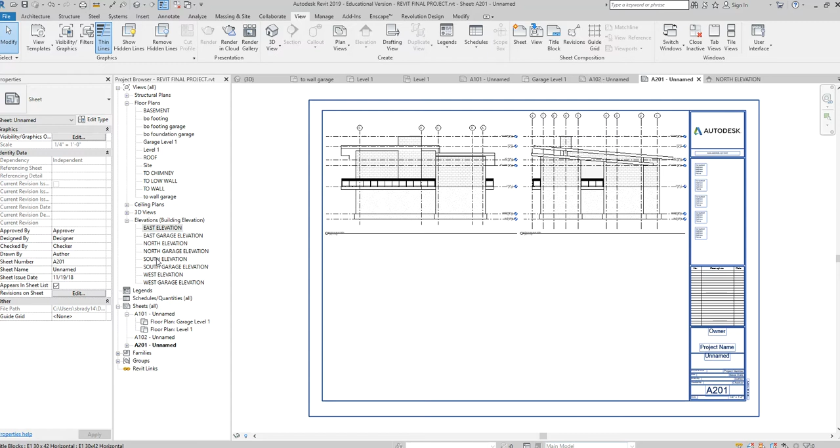But so you have your north, you have your east. Let's bring our south and west on here, and then I'll stop lining these up. Okay, click. Very nice, that one sort of lined up nicely. These seem a little high, actually, on my sheet, so I'm going to bring them down just a tiny bit.

Click, click. I'm going to turn my crop region off. Click, click. And then my west elevation. See how much they come in just so much nicer when you start to clean them up on your sheets before you place them.

Click, click. And you know, they're tight, they're very tight on there. I could bring my grids in just a little bit more, but that's acceptable. They look nice on the sheet, they're not overlapping. The datum markers are not overlapping the title block.

I could have made them, instead of, I think they're a 1/4 inch. I could have made them an 1/8, but I think if I made them an 1/8 inch, they might be too small. So I'm just going to leave them at a 1/4 of an inch.

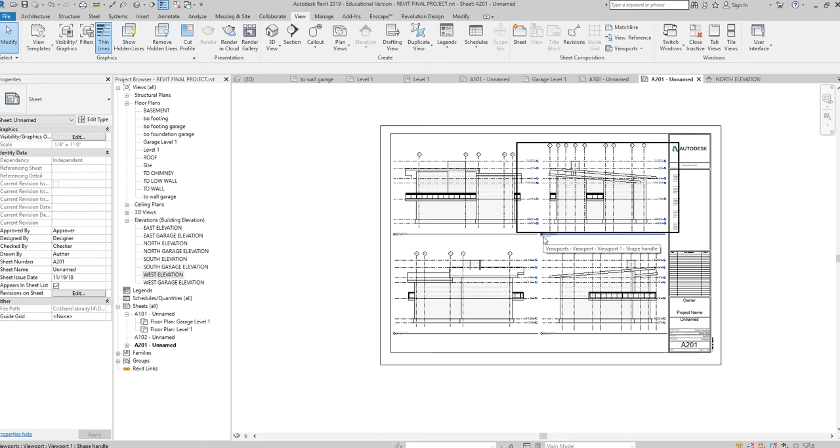If I had to, you know, this is somewhat tight. When I start adding annotation, maybe only 2 elevations per sheet is appropriate. So one on the top, one on the bottom, okay.

But my point is now, when I print this, it's very nice and neat. All of these are a little bit higher than these, right? So I could click, click, and with our OCD, doing what we do, click, click, I could drag them down. But those simple things just make a huge, huge difference.

Now I've got my little floor plan here. Oh, what have I done there? Oh, I don't think I'm cropping my view there. See, I'm cropping. There we go.

Ooh, this little guy is causing issues. Hide in view element, there we go. So I've got my little garage here, but now I'm thinking, my little garage has some little elevations, and maybe these go together. Maybe I end up putting this on the elevation sheet.

You okay over there?

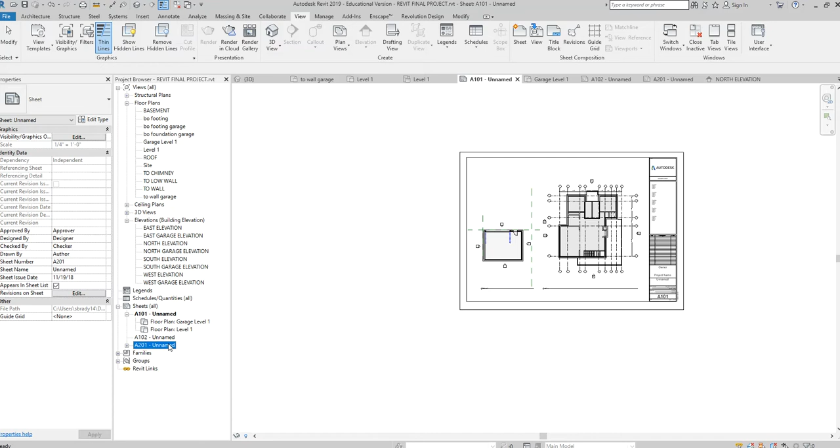Maybe I put my elevations on a sheet with this floor plan, and that works, right? So I'm going to create a new elevation sheet. Right click, oops, AE202, right? And I've got the north garage elevation.

Oh my gosh, what's happening there? And then once it's on the sheet, you're like, oh, what do I do, right? It's such a pain in the neck. So in my opinion, I'd click on it and hit delete, and go back and fix it in the view, then place it on a sheet. Essentially, my crop region is just too tall, which is so easy to fix, right?

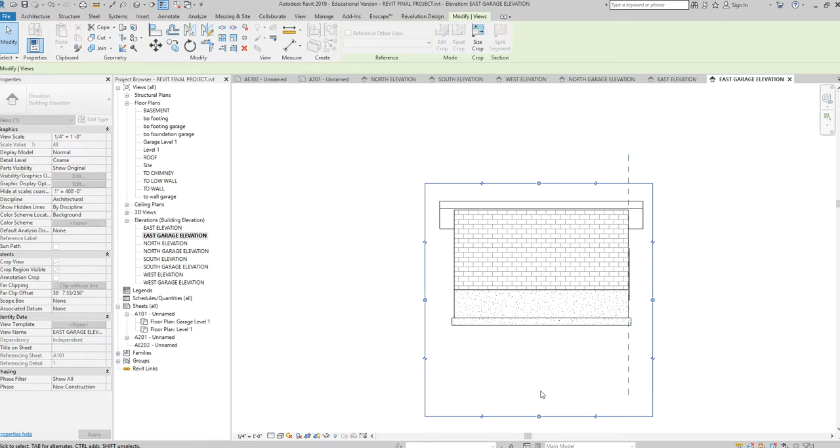Looks great. Okay, same thing here. Okay, you guys get the idea.

But these little guys, so if I go to my 202 - whoops, clicked one too many times. Right, I could place 3 or 4 of those at a quarter inch scale and get north, east garage. Get a few of them. Ooh, that hurts my head, right? It'll hurt your head eventually too, right?

And it's just so easy to line them up. So take care in getting things lined up. I could do two more elevations and put my floor plan for my garage on there if I wanted to. Drag that down. Maybe we put the little garage elevation there. Move these over. It's just getting fun, Robert.

Okay, click, click. Right click, hide in view elements. Click, click. And you figure out a nice way for them to all fit on there, right? So for your cover sheet, you're going to create a cover sheet, call it cover sheet, and then I would just put some view on the front of it. So I think a good view is to do a 3D view.

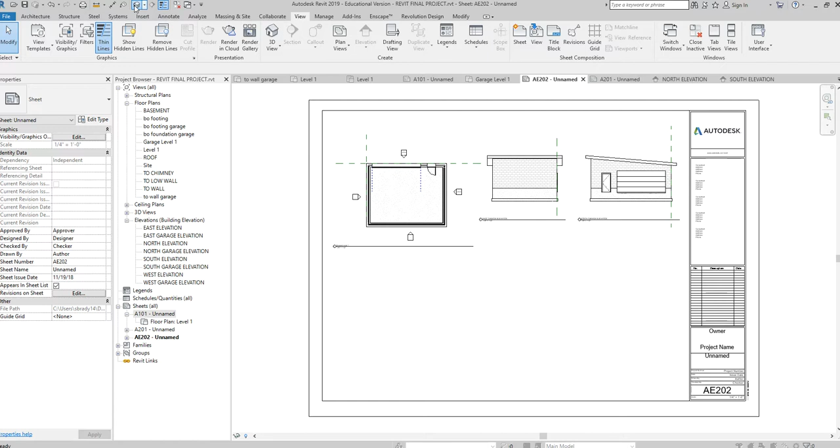I at first really liked these levels. This is, you know, a new thing, maybe you don't know. These levels being able to view them in 3D is a new addition. In 2018, that was not available. At first I kind of liked them, and now I don't really know if I like them so much, because you can see them everywhere, right?

So I'm going to use my visibility graphics. This is something we talked about, we haven't used a lot. VG, visibility graphics - this is like a layer dialog box. And I'm going to go to annotation, right? I'm just showing you a bunch of different ways to do lots of stuff, but I'm going to go to levels, just in this view, levels, and turn them off.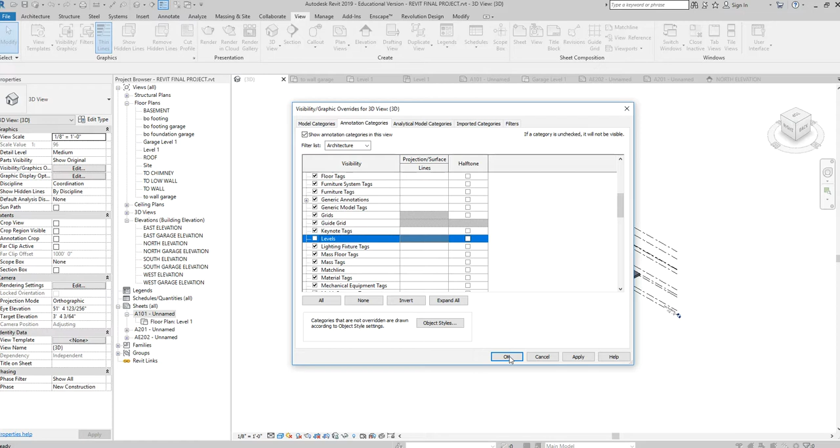Right? I can use my little view cube to swing around my house and pick the best maybe view of my house. Okay, I like that view, right? Maybe I don't like that view. I want to show the front of the garage.

Let's see. No, I like the view I was on. Here we go, we'll choose that view. Or maybe you could flip it up just a tiny bit. But I really like this view of the house. It kind of shows everything I wanted to show, right?

So I've got my 3D view here. This is the default view when you click on this little house. Right click, duplicate view with detailing, 3D copy.

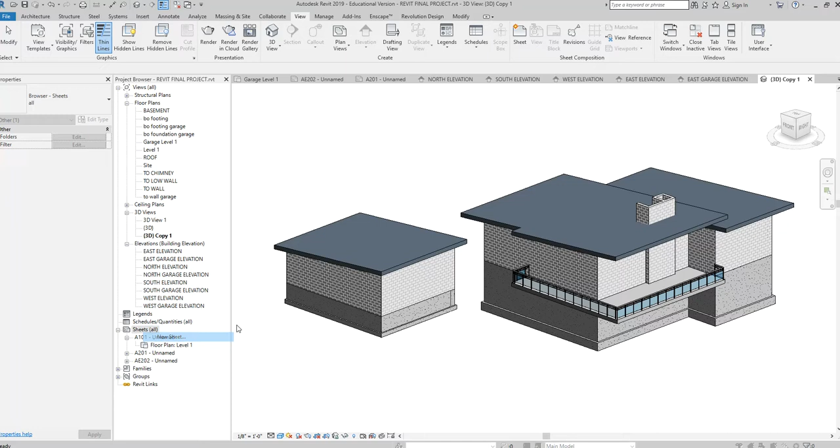So now if I create a cover sheet - sheets, right click, new sheet - I could drag that 3D copy, and place it on the front. You could put some text, you know, the Imbue Cabin Project, or you could put your name or whatever you want to do, right? You can even make this larger if you don't want to do anything else on the cover. You can add a couple of different views. You could do some elevation views on here, whatever you think is kind of nice to look at.

So let's make this a quarter of an inch. Click, click.

And there's our cover sheet, right? Of course, you'll have the beautiful windows and everything.

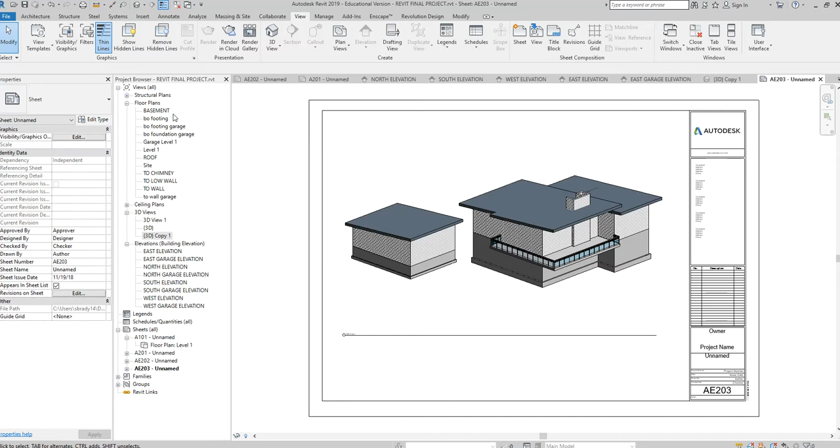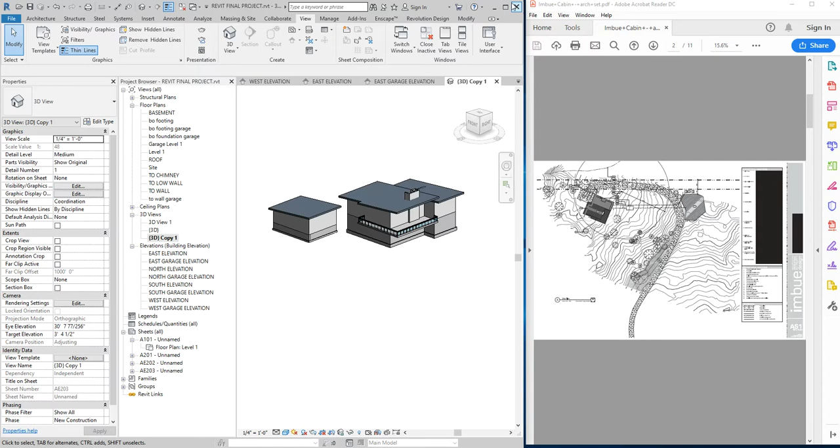Okay, one other thing I want to get to tonight, not horrible, but I want to show you because one thing we're seeing in the Imbue cabin that we don't have here is topography. You're seeing this photoshopped or rendered image showing some topography. We're not going to make it as complex as that, but sometimes it's nice to see a ground plane instead of just floating houses, so it looks sort of grounded. So I want to show you how to add just a quick piece of topography around your house.

And I'm going to do that by going to... good question, what level should I go to? I'm just going to go to level 1 - no, we'll go to site. No, we won't, we'll go to level 1.

So 2 things I have to show you to create topography: 1, how to create it, and 2, how to obscure it from your houses. I'm going to go to the massing and site tab here, click on that, and you'll notice we have topo surface here. I'm going to click on that.

And I'm brought into sketch mode, but this sketch mode is a little more loosely defined than a regular sketch mode. I'm going to use points to create my topo surface. So when I want to create just a very generic flat topo surface, maybe like a rectangle, just to show a ground plane, I'm going to click around the edge of the building. I'm going to click out here - 2, 3, 4.

And I just clicked 4 elevations, okay? So these little points, I want you to notice the elevation says 0, and it's associated with the level I set before I initiated the command, so it's at level 1. I don't see anything happening out there, right? Nothing really happened, but if I hit finish - oh wait, yes it did. Maybe something didn't happen. So the reason I wasn't seeing a whole lot was because I suspect my crop region - let me hit undo so I get back in the command.

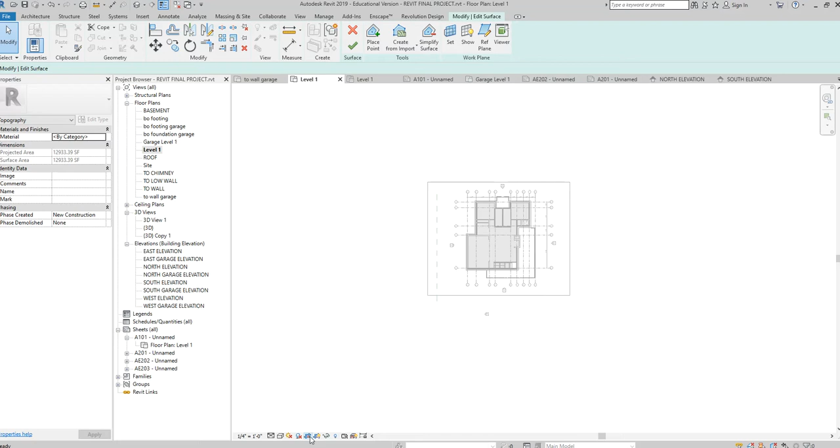Okay, so what was happening is I was creating my points beyond my crop region. Let's go into 3D mode. You know what I actually think is happening - hold on, I think that under visibility graphics, by default topography is turned off. That might have caused a few issues with you guys. So I'm glad I was able to record that so you could see that.

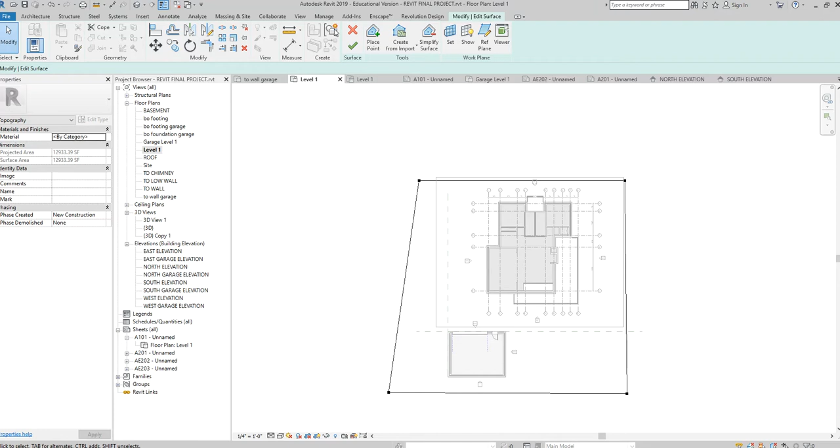But what was happening is when I was doing that, I was creating these points - 1, 2, 3, 4. If I click on this one, the elevation is 0. If I click on all of them, the elevation was 0. And when the elevation is 0, I create just a flat plane. So I hit finish, go into 3D - or you can see it in any view - but essentially I've just created a little plane of Earth.

Now right now it just looks like what are those people called that think the Earth is flat, right? Flat earthers - hopefully there's not a flat earther in here. But that's because I'm not engaging it. If I click my section box and drag it in a little bit, let's see what happens - I start to cut my Earth plane, and then I can see that it is actually an object that I've generated.

So my section plane comes in, and now it looks more like a real piece of topography. I placed this at level 1, which was probably a mistake. I'm going to click on it and go to an elevation, north elevation - and you see now how I have some topography? That's very nice. I'm going to move it down just a little bit, like 2 feet.

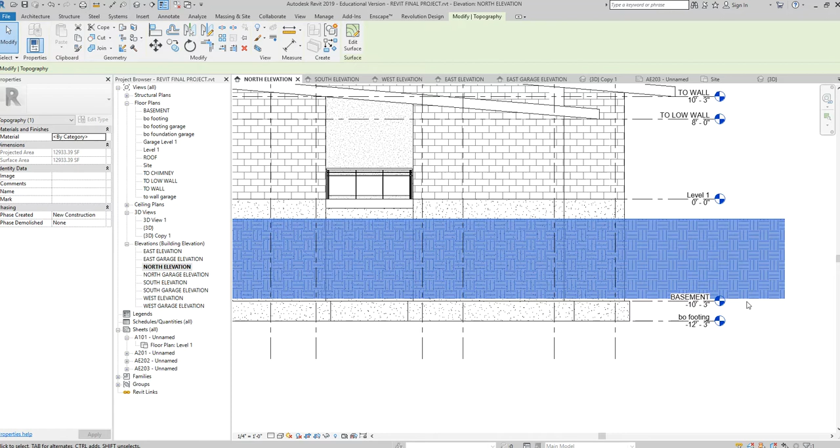There we go. Okay, now by default my topography will only go down 10 feet, so you can see I still have like 2 foot 3 inches below this. If I go to massing and site again and click on model site, there's a flyout here.

Okay, this tells me that my earth will go negative 10 feet below wherever it starts. So let's do negative 15 feet instead. Hit apply, okay.

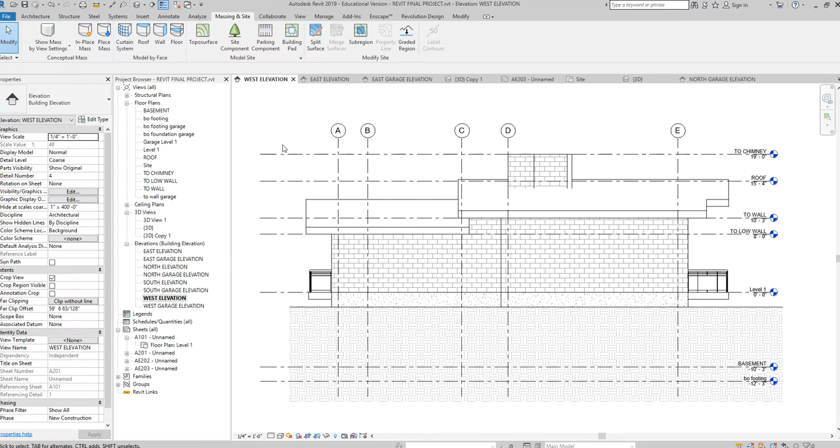And this one's a little obscure, but massing and site, model site, my little flyout here. So now it's kind of nice, right? I have some grounding in all of my elevations. So my east elevation, my garage, I sort of have a ground plane there. And that's nice - I created it at level 1, and then moved it down a couple of feet, right? And that works. I go into 3D mode, and I have this nice ground plane. If you want to move it down even further, you can. I think it's a nice thing to have - it makes your drawings look somewhat complete.

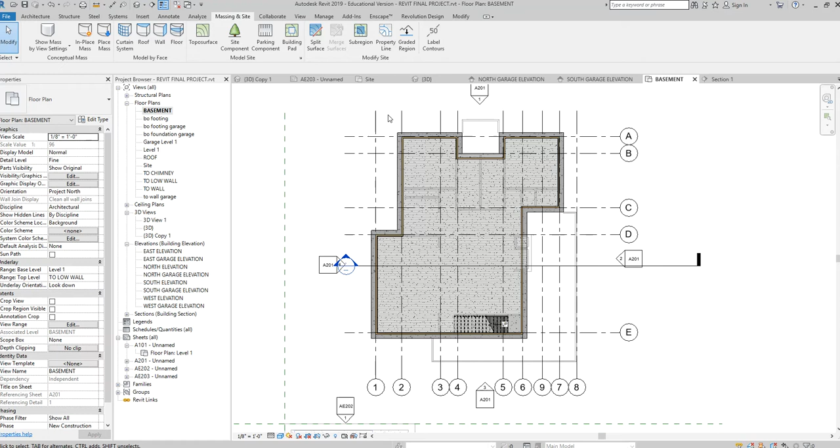But this is one downfall, though it's very easily managed. I can go to, and you don't need to worry about this, but I'm just going to show you how to fix it in case you want to do this. In my basement, if I have a piece of topography in my drawing, all you have to do is add a building pad into your drawing.

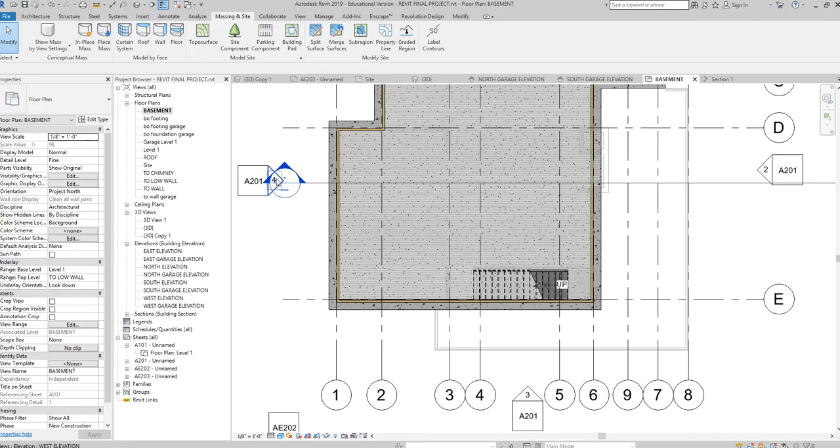And a building pad, I'll show you a little drawing here, essentially creates a void in the topography where your building lives. So if I click on building pad, I go into a sketch mode, and I'm going to draw a boundary around where I want my topography to stop - just outside my foundation wall. So I'm outlining my foundation wall. There we go, this is sitting at my basement. I think that'll work. I hit finish - nothing happens really, but when I go back into my section, you see now how the topography is not inside my building.

So you create a building pad and it voids out that topography inside of your building. If you want to do that, I think it's an easy thing to do and it makes sense. You can place it at level 1 and then go into an elevation and move it up and down, just placing it wherever you want it to go.

Any more questions on this little house so far?

Okay, so I think with these videos you'll be able to get the architecture finished. But things I additionally want you to start thinking about is how to place them on sheets - make sure that they're nice and neatly placed, make sure that they line up, make sure that they don't overlap the title block. Oops, see, it's starting to happen now - I added something and look at that, now it's starting to overlap my title block, so I'll have to edit my crop region there.

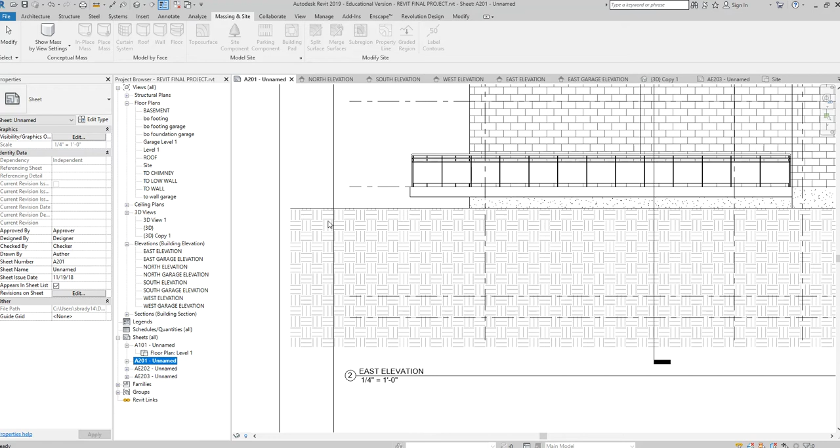Make sure that you place things so that they make sense on the sheet. Oh, my crop region, click, click - I turned it off to view something, click, click. Now I forgot that when I print, something is weird down here. So place things, change them in the view, make them look nice in the view, place them on your sheets. And then before you create a PDF, go back over the sheets, look at them, and make sure you didn't change some view setting to make it look odd.

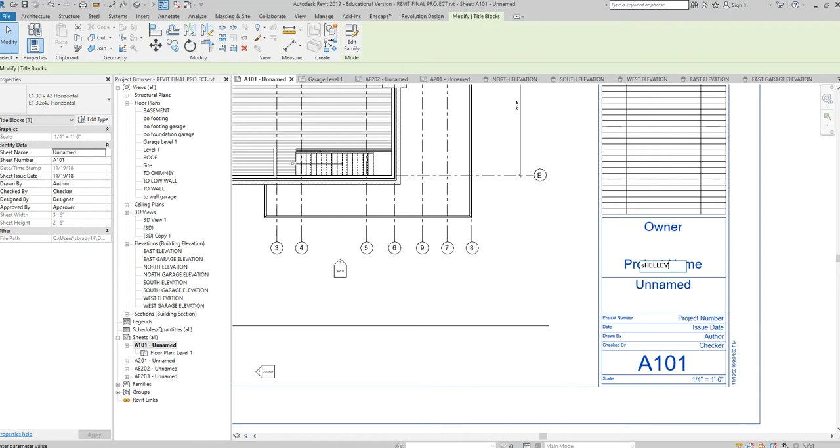Any other questions? What about the title block, do you need to do anything with it? No, I don't, not for now - I would just fill some fake information out in here. So click on here and you could say something like Shelley's cabin. Just fill out some fake information there. I think we're just going to leave the title block as kind of out of the box.

There's also a sheet that says reflected ceiling - those are your ceilings. Yeah, it's a floor plan, but it shows your ceiling. Oh okay, like the underlays and stuff. Yeah. Okay, so final question is...